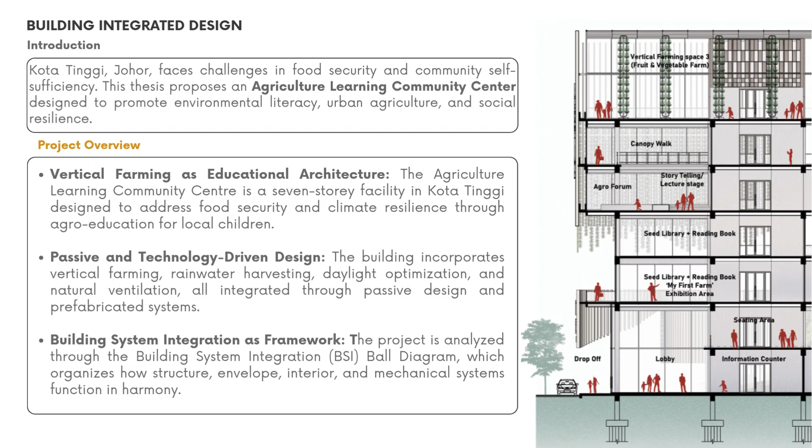I will be using building system integration as the framework, where the project is analyzed through the building system integration ball diagram, which organizes how structure, envelope, interior, and mechanical systems function in harmony.

From a structural standpoint, this building uses reinforced concrete slabs and columns as the main structure. It uses a 150mm thick reinforced concrete floor slab with vertical columns that support all superimposed and vertical loads, as well as the envelope and farming systems, where structural components anchor secondary systems like galvanized louvers, curtain walls, and farming racks to ensure spatial openness while distributing mechanical loads.

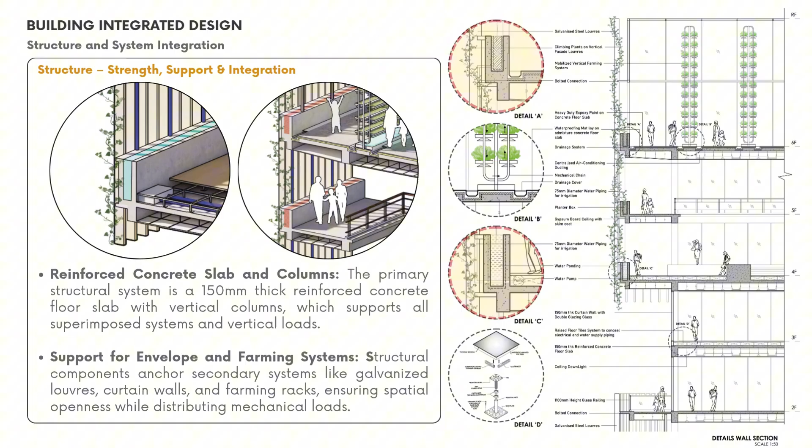The building envelope chosen for this project is galvanized steel louver with climbing plants, using vertical steel louvers attached to an aluminum steel substructure. This provides shading, thermal control, and structural support for vegetation. The envelope is a ventilated biophilic facade system, creating a breathable building skin that allows for passive cooling, natural lighting, and integration of living greenery into the facades. The curtain wall also incorporates daylight strategy, where double-glazed curtain wall portions are oriented to maximize daylight, enhancing indoor comfort while reducing energy demands for artificial lighting.

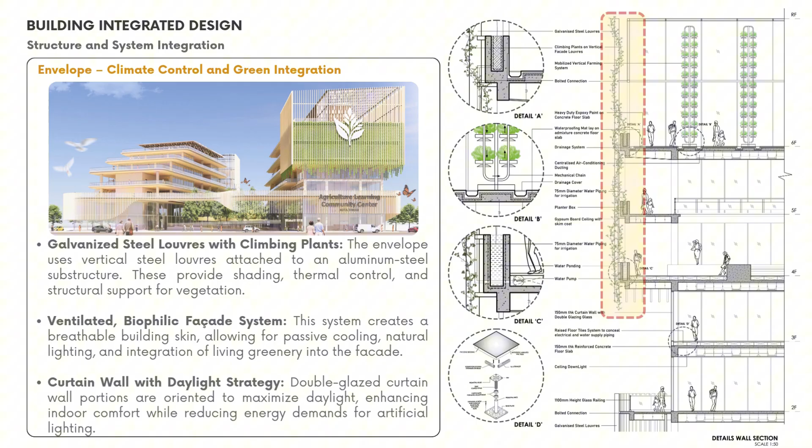The interior design focuses on sensory experience and flexibility. The raised floor and learning deck in the interior space conceal irrigation and electrical conduits, while superimposed farming decks enable flexible space programming. Natural materials and a breathable layout were applied, with materials and finishes chosen for tactile comfort and to foster a breathable, adaptive environment suited for education and farming, while enhancing the visual and physical connection to nature.

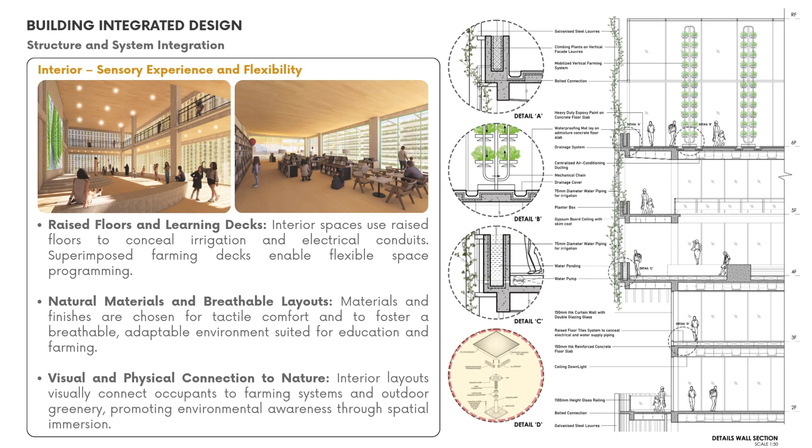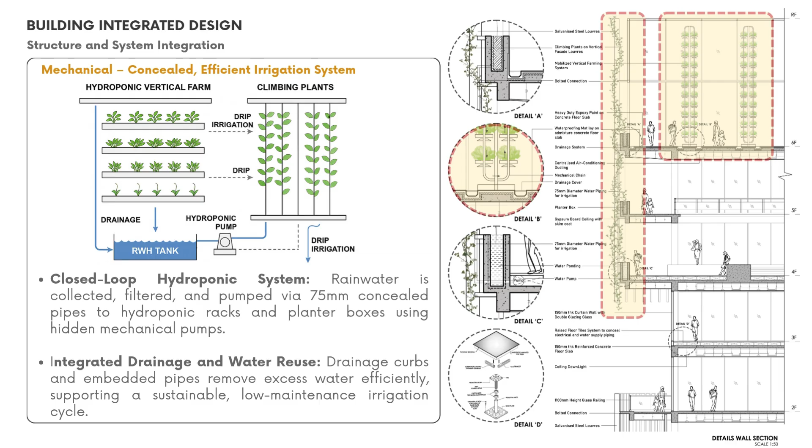From the mechanical aspect, the vertical farming system and climbing plant system use a closed-loop hydroponic system, where rainwater is collected, filtered, and pumped via 75mm concealed pipes to the hydroponic rack and planter boxes using hidden mechanical pumps, as shown in the drawing. The integrated drainage system allows water to be reused, where drainage curbs and embedded pipes remove excess water efficiently, supporting a sustainable and low-maintenance irrigation cycle, as shown in the detailed drawing.

This is the BSI ball diagram for my building, which uses four-system integration, combining the structure, envelope, interior, and mechanical systems of the whole building. Together, these systems are physically and functionally linked through the BSI model to improve environmental performance, user comfort, and long-term adaptability.

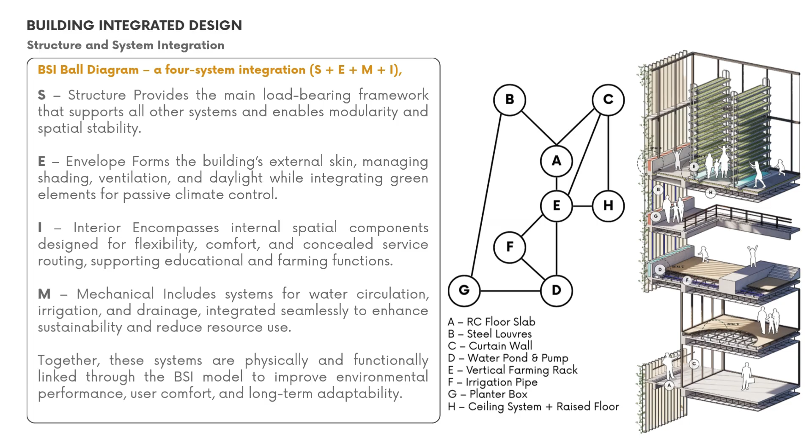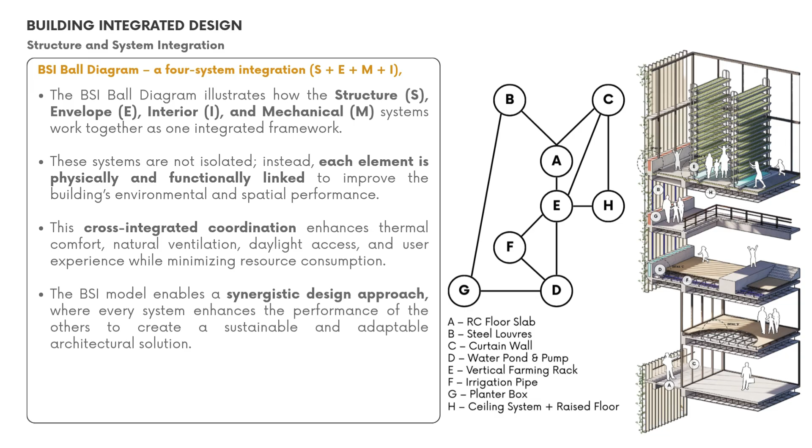This diagram illustrates how the structure, envelope, interior, and mechanical systems work together as one integrated framework, where these systems are not isolated. Instead, each element is physically and functionally linked to improve the building's environmental and spatial performance, where this cross-integrated coordination enhances thermal comfort, natural ventilation, daylight access, and user experience while minimizing resource consumption. It also enables a synergistic design approach where every system enhances the performance of the others, creating a sustainable and adaptable architectural solution.

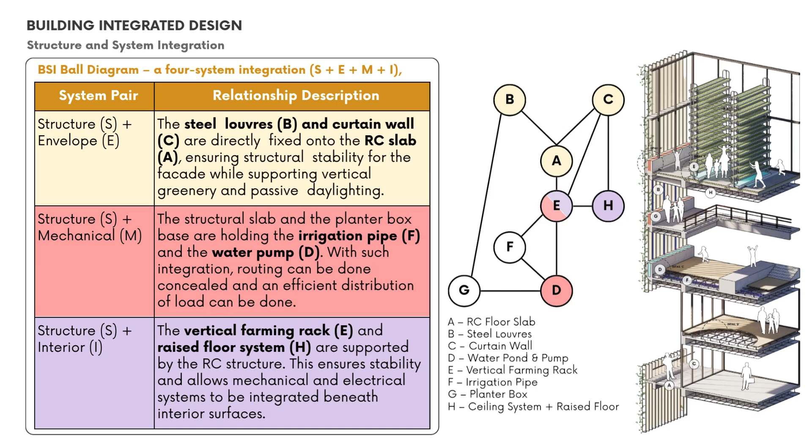This ensures the stability that allows the mechanical and electrical systems to be integrated beneath the interior surface. The next one is the mechanical plus envelope, where the green louvers and irrigated planter box demonstrate the meshed integration, where the water supply, drainage, and planting media are embedded within the facade elements, supporting sustainability and biophilia. The curtain wall also directly affects the interior thermal and daylight conditions, influencing both comfort and plant growth within the vertical farming rack.

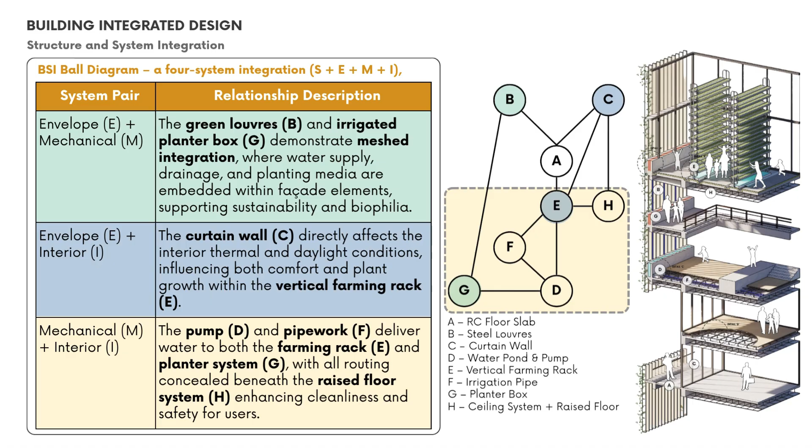For the last one, the pump and pipe work deliver water to both the farming rack and the planter system, with all routing concealed beneath the raised floor system to enhance cleanliness and safety for the user. The impact of building integrated design on air quality is to meet the human needs.

From the physiological needs, the integration of vegetation and vertical farming significantly improves indoor air quality by increasing oxygen concentration, regulating humidity, and filtering out pollutants and allergens. This creates a healthier respiratory environment, particularly important in a learning and enclosed space.

In terms of psychological needs, the presence of greenery offers multisensory stimulation through scent, texture, and colors, which promotes relaxation, concentration, and emotional well-being.

In terms of sociological needs, the green walls and open farming space support intergenerational learning and social engagement, where users can interact with the farming system, building environmental awareness and strengthening community participation.

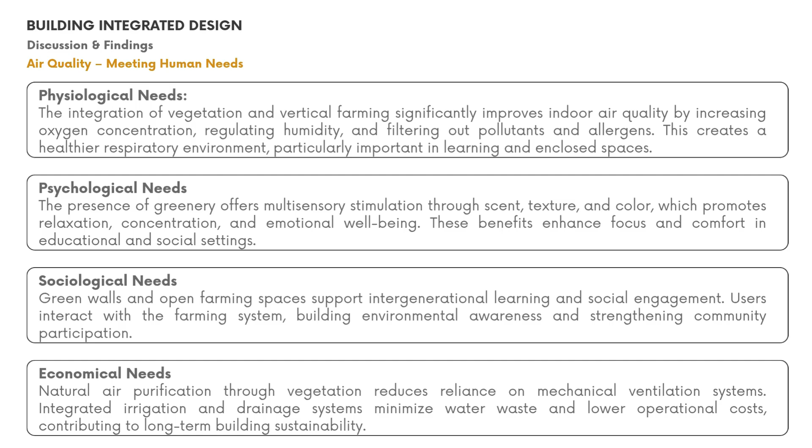From the perspective of economical needs, natural air purification through vegetation reduces reliance on mechanical ventilation systems, where integrated irrigation and drainage systems minimize water waste and lower operational costs, contributing to long-term building sustainability.

For the impact on thermal quality, from the physiological needs, thermal comfort is supported by the vertical louvers and green facade that reduce heat gain, and open air corridors and cross ventilation maintain moderate indoor temperature, preventing heat stress.

The thermally adaptive space allows diverse users to engage and share the environment comfortably, where shaded zones and informal transition areas provide inclusive gathering spots throughout the day, which fulfills the sociological needs.

Economical needs can be shown by minimizing mechanical cooling through stack ventilation, shaded facade, and evaporative cooling. The design reduces energy use, lowering peak loads and utility costs, making it more cost effective for community-based programs.

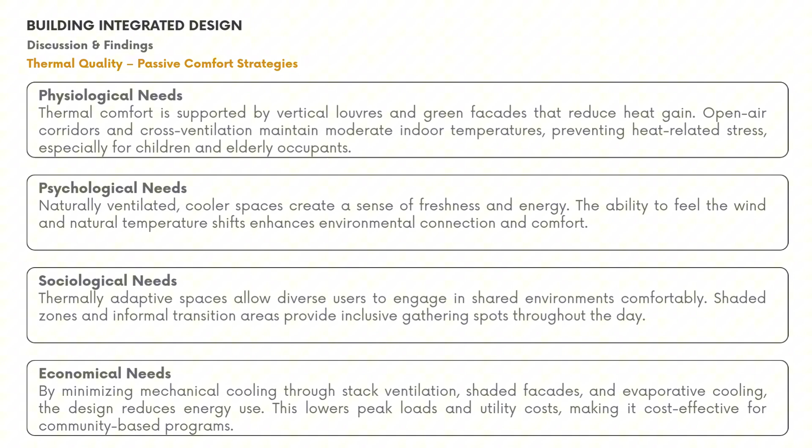The impact on building integrity involves structural performance and adaptability. Robustness is ensured with reinforced concrete slabs and detailed structural connections, where the system withstands normal use and extreme events like heavy wind or floods, protecting users physically, which fulfills the physiological needs of the user.

From the psychological needs, the visible use of strong materials like concrete and steel enhances the sense of safety and confidence. The clear articulation of the structure and envelope fosters feelings of order and emotional security.

For sociological needs, the modular, reconfigurable structure supports flexible use, from classrooms to farm areas or emergency shelters. The design promotes ownership and adaptability, strengthening community ties.

From economical needs, the prefabricated aluminum steel frames and modular panels reduce construction time and waste. The durable materials lower long-term maintenance costs and simplify replacement, ensuring life cycle efficiency and public sector affordability.

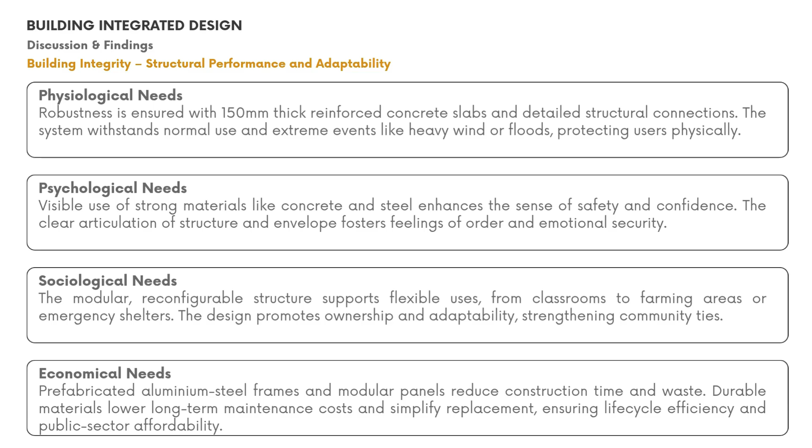In conclusion, the design showcases how architectural technologies are integrated to meet diverse human needs and environmental challenges, where the galvanized steel vertical louver facade is a key example of climate responsive design that combines shading, ventilation, and biophilic benefits.

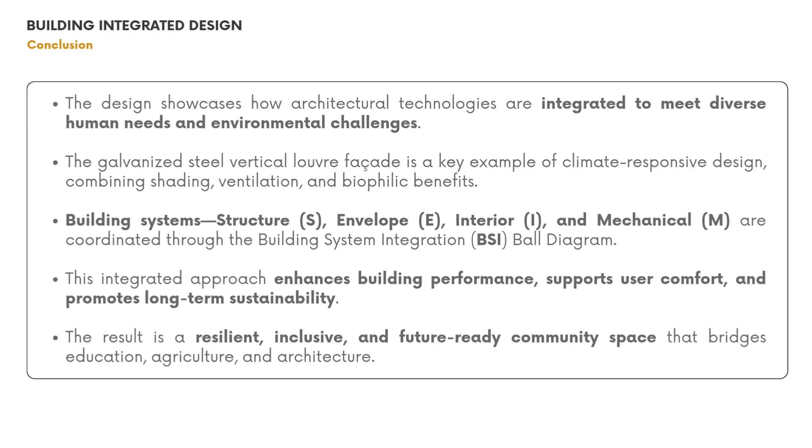For the building system, the structure, envelope, interior, and mechanical elements are coordinated through the BSI ball diagram, and this integrated approach enhances building performance, supports user comfort, and promotes long-term sustainability. The result is a resilient, inclusive, and future-ready community space that bridges education, agriculture, and architecture.